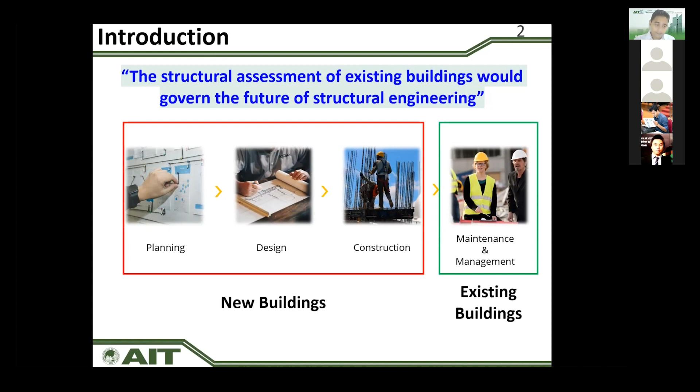Let us begin the parallel session of this AIT Tech Talk. I would like to start by stating that the structural assessment of existing buildings would govern the future of structural engineering. This is because while the construction of new space is just approximately 2% annually in countries like the USA, it is deemed to further reduce over the next few years and decades in most countries, mainly due to construction surge saturation and the construction of all the buildings happening right now. The domain of existing buildings would be more prominent, and these buildings need to be maintained and managed for the reduction of their capacity due to various reasons, and increase in demand due to natural or man-made hazards.

Today, I, Chaitanya Krishna, a faculty of Asian Institute of Technology in Structural Engineering, specialized in seismic assessment of reinforced concrete buildings, would be introducing the concepts of structural assessment of existing buildings, the challenges, opportunities, and our experience in conducting academic research and real projects, along with Dr. Prameen and Ziauddin.

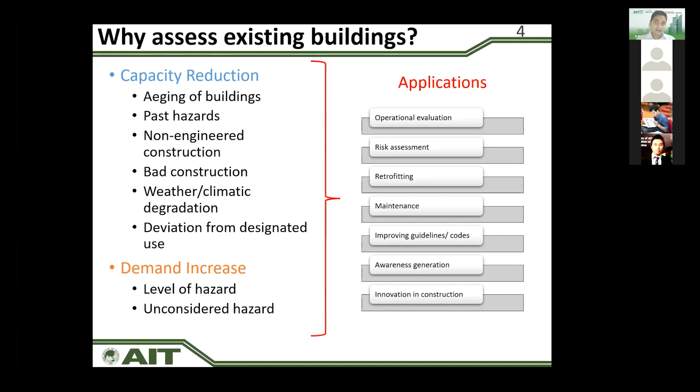This includes post-earthquake or post-disaster investigation to know the occupancy level of the building, or risk assessment by governments for creating disaster management plans, retrofitting or maintenance and related studies, or improvement of existing guidelines or codal provisions for future buildings, or creating awareness among communities, or using this as an outcome for innovation in the construction industry or retrofitting industry.

So where do we stand? We stand in between the real world and the analysis world, where the real world is full of unpredictable threats, large building stocks, unacceptable construction practices, and huge scatter in material uniformity, creating a huge amount of uncertainties.

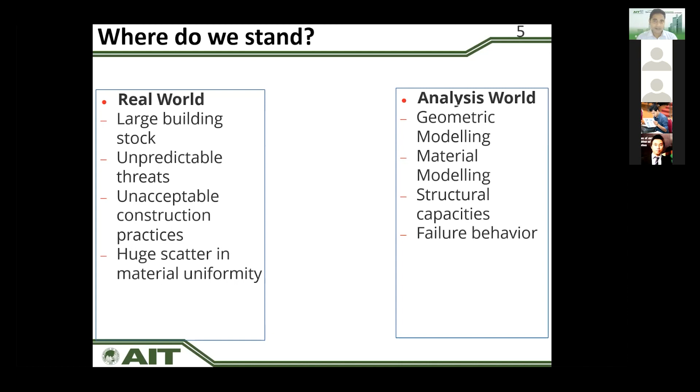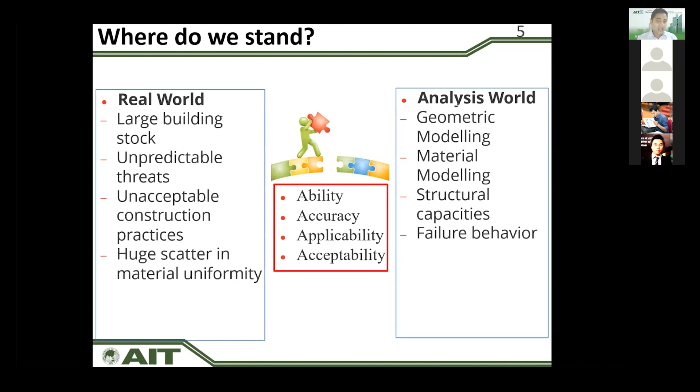Whereas the analysis world is mostly comprised of mathematical components such as geometric material modeling, or the structural capacities, or considering failure behavior. So we structural engineers try to bridge the gap between the real world and the analysis world with the principles of the 4 A's: ability, accuracy, applicability, and acceptability.

The engineering categorization of these analysis methods could range from the late 1800s, where expert opinion based approaches were used in the beginning to conduct the analysis of existing structures, when computers were yet to arrive and all the methods were yet to be in place where they are today. As mentioned by previous speakers in the morning sessions, it is very important to know that structural engineering is 80% common sense.

As the age progressed, we went for rapid visual screening or post-disaster assessments through questionnaires, or through visual inspections, or by using some basic measurement equipment to understand the behavior of buildings after a disaster, and using that as a knowledge base for future constructions, etc.

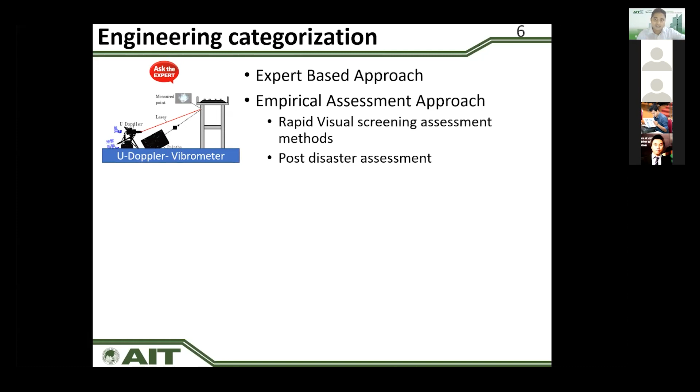The analytical assessment approach is mostly the numerical work that we do on software, on the nonlinear analysis software that we as structural engineers have been using.

A more recent and popular approach in recent times includes the use of non-destructive testing and structural health monitoring. So broadly, these are different approaches, and a combination of two or more approaches is the most desirable one. The analytical and experimental approaches are the hot topics that we are currently trying to develop, with a lot more projects and research in this particular domain.

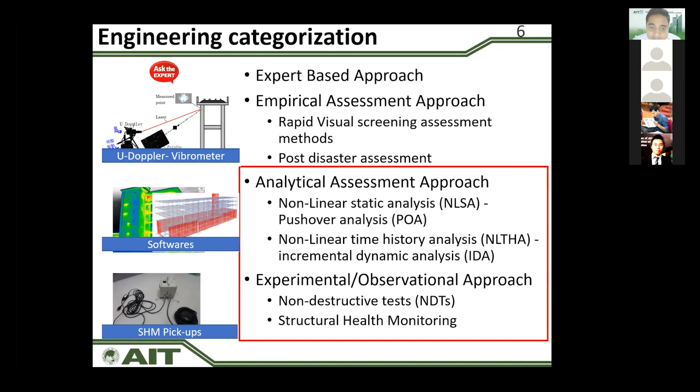Coming to some of the recent methods that we are interested in: structural health monitoring, where experimentation and system identification had started a few decades back.

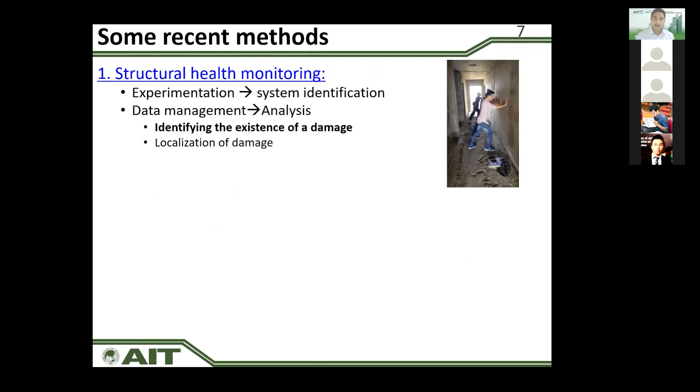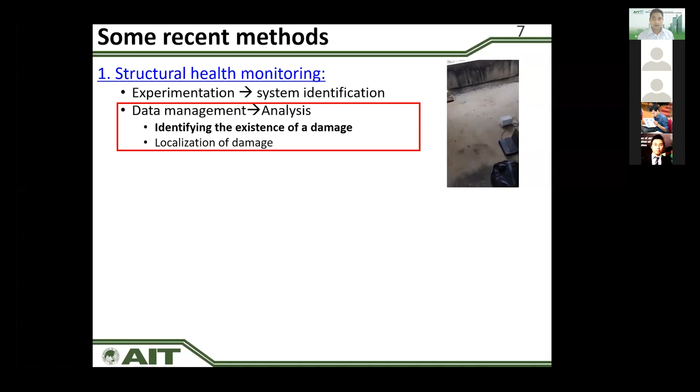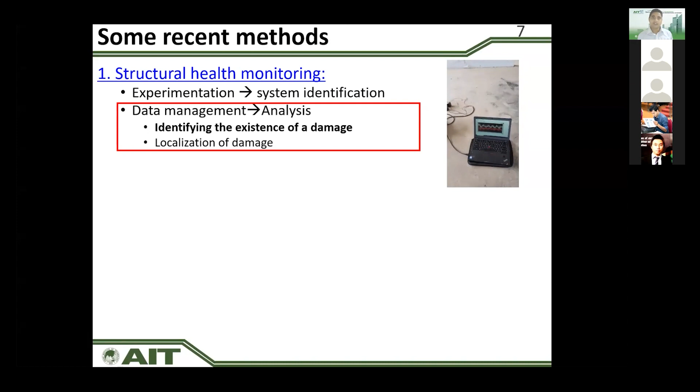And now it is coming into practice in terms of analysis, so that level 1 and level 2, identifying the existence of damage and quantifying the severity and location of the damage, has become a fast-moving research area in structural health monitoring, with the increase in availability of different testing methodologies. One more area gaining attention, and one we are interested in working with, is machine learning, which is more meticulous and superior, especially when the data set is fuzzy, vague, or noise-contaminated.

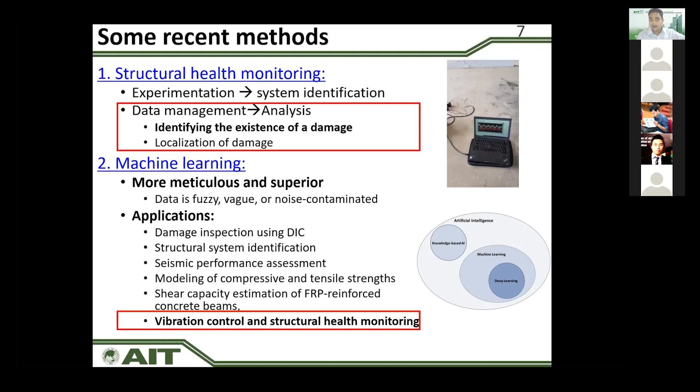The application of artificial intelligence is in various areas, such as damage inspection using digital image correlation, structural system identification, seismic performance assessment, material modeling, or estimation of capacity of the structure. What we are more interested in is using machine learning for vibration control and structural health monitoring in future, so that material property identification becomes a lot more data centric and reliable, so that whatever values you put in your numerical tools have higher meaning with respect to the available data collected in the last few decades.

Some of the academic research topics we have been working on will be shown here. One topic is where we try to merge a forced vibration test, called experimental modal analysis, and an ambient vibration test, which is operational modal analysis. We combine them with the help of numerical techniques, so that we could get modal parameters, and those modal parameters can be transformed into physical parameters to be used in numerical modeling, such as finite element methods, etc.

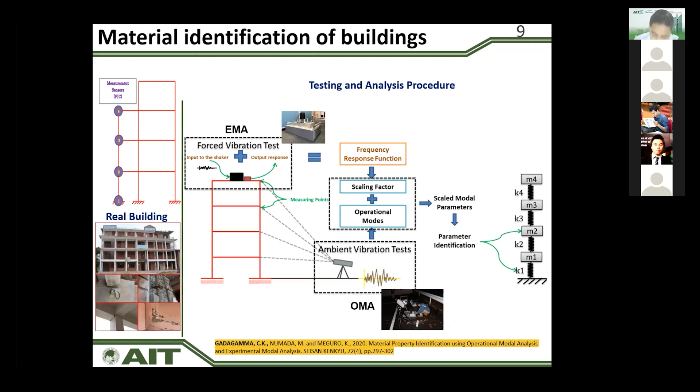Another research topic is a problem-based topic where buildings in Nepal particularly have businesses on their first floor, and because of these businesses, the buildings have the problem of soft story in the aftermath of an earthquake. But merely asking people to close their business by using a retrofit cannot be a direct solution. There are two major problems: one is the economic affordability of people living in these houses, and the second is asking these people to close their livelihood, which comes from businesses or parking lots, etc.

Academically, what we tried to do is use mathematical concepts, or the concept of numerical optimization, to optimize between the strength or safety required, and making sure there is enough or adequate space for the landlord to run a business inside. At the same time, not using steel or BRB braces is another way of reducing the cost involved in this particular retrofit.

So as an academic approach, using a technique called sequential quadratic program, we could optimize the usable space with respect to the strength, and found that the strength of these buildings was increased by allowing some amount of business space for these people, and by making use of concrete as a retrofitting material, the cost or locally available retrofitting material was achieved in this research.

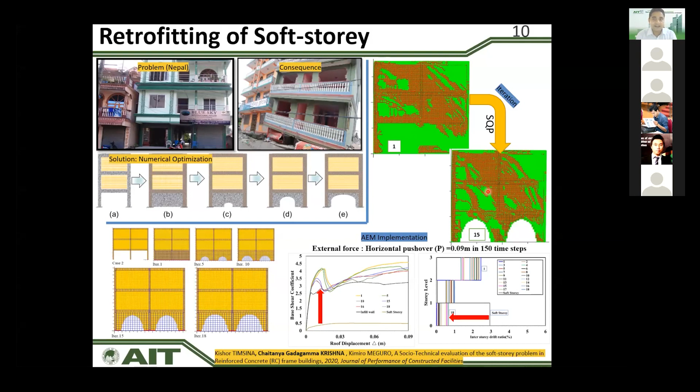In another research, we were trying to find the problem of non-engineered construction in countries like India, Nepal, Pakistan, Bangladesh, or many other Southeast Asian countries, where there are plenty of problems. One of the problems we identified was improper rebar splicing. But this is not just one problem; there are plenty of other problems with respect to the construction industry, which is highly localized by inexperienced and non-technical masons.

Studying this experimentally would take ages to cover all the problems we have on our sites. So a low-cost experimentation using microconcrete, combined with numerical modeling, was used in this approach, so that the cost of experimentation is lower, and alternative arrangements or possibilities could be evaluated numerically by validating the experimental model, allowing a large number of case studies to be done through this academic research.

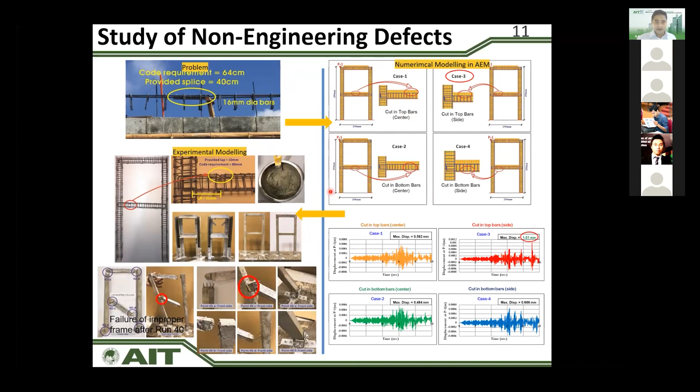This is another research in which blast analysis was summarized. Here we have highly nonlinear modeling software in practice. One such software is called Extreme Loading for Structures, which follows the applied element method technology to model blast loads. However, unlike wind loads or earthquake loads, blast loads do not have comprehensive assessment procedures.

For example, questions like how to compare different blast loads on a building, what is the capacity of a frame subjected to blast load, how to strengthen the building to withstand blast loads, what is the effect of debris fall, or is the debris lethal, etc., are questions that cannot be answered from numerical modeling alone. So what is needed is a comprehensive blast response analysis.

So in this research, what we do is, from the highly nonlinear modeling that we get, the results are summarized into structural blast, debris analysis, and residual capacity of the frame.

With this, you can summarize blast effects for different kinds of buildings, different kinds of claddings, or maybe you can strengthen the building and then apply blast. Different cases can be compared, like in the case of earthquake or wind loads on structures.

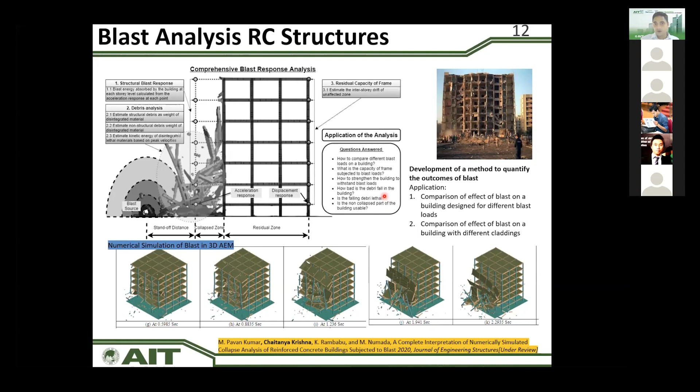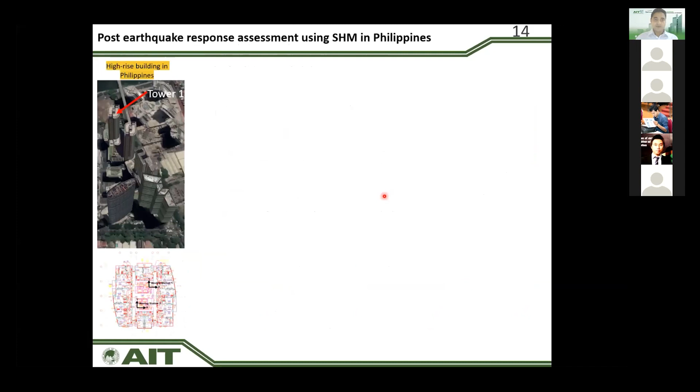Coming to real projects executed in AIT, I would like to show you a project in the Philippines, for which the methodology was to measure the dynamic characteristics of a building before and after an earthquake. Modal identification was done for both cases, and a preliminary evaluation was done to proceed to a detailed investigation.

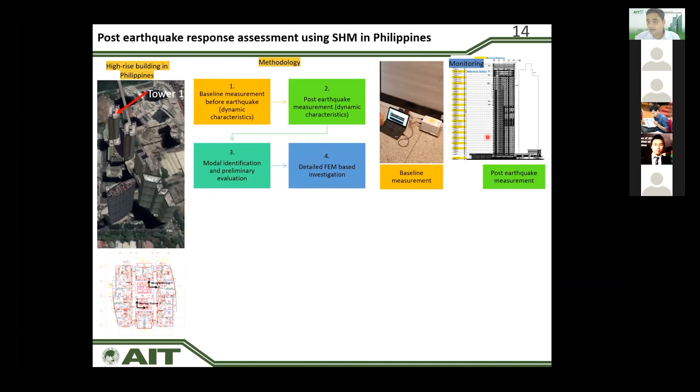For this purpose, a baseline measurement and post-earthquake measurement was done. After analyzing the modal properties, we could see from the preliminary evaluation that the change of natural period had shown some damage, and therefore it was recommended to proceed to a detailed investigation in this project.

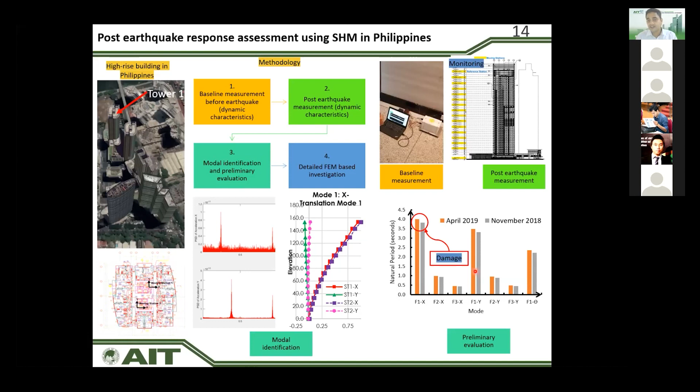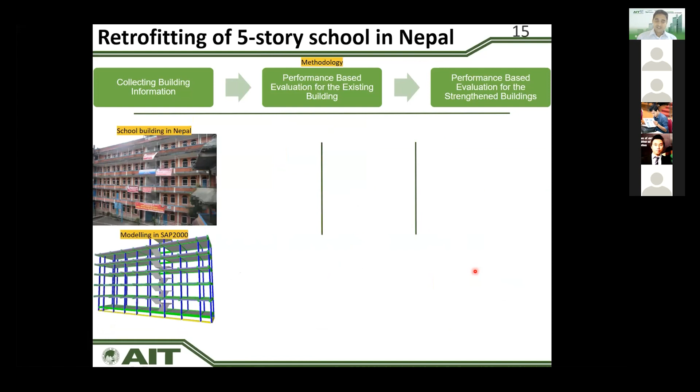A school building was considered which suffered damage in the Gorkha earthquake, and was modeled in SAP. Three different retrofitting methods - column jacketing, shear wall, and buckling restraint braces - were recommended and modeled in SAP to evaluate this.

Nonlinear static pushover analysis was conducted to find that shear walls were more effective, and column jacketing was highly ductile at the global level, but further member level investigation was needed according to this project's conclusion.

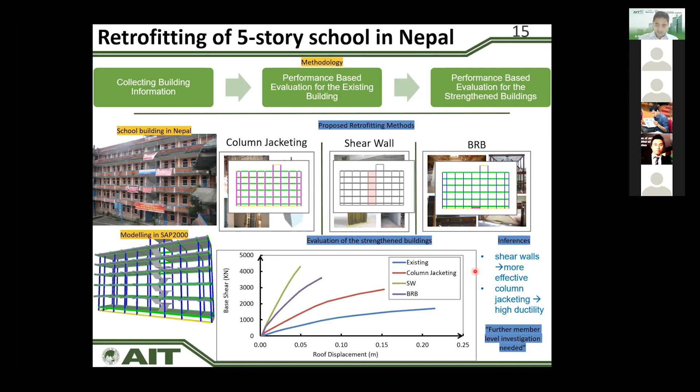Some more similar projects executed in AIT include a 4-story hotel building in Nepal, for which shear walls were proposed based on performance assessment.

A retrofitting or re-strengthening strategy was investigated for a reinforced concrete building in Bangkok with the same methods: column jacketing, shear walls, and steel bracings.

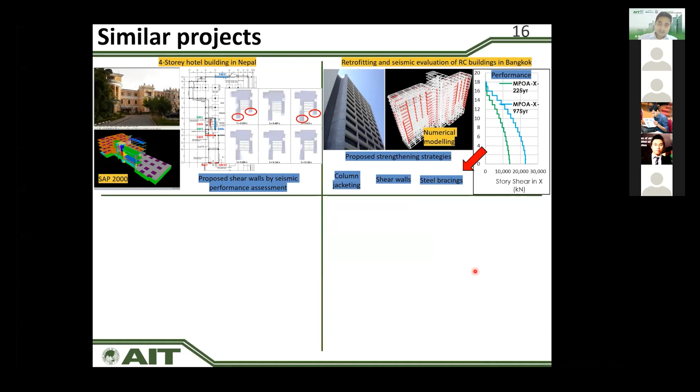A similar reinforced concrete frame building in Nepal, after the Gorkha earthquake, was evaluated for a proposal of shear walls in the building using ETABS and Perform 3D.

A similar investigation in Bhutan to verify the adequate demand capacity ratio, to see whether the building was safe or not, was executed.

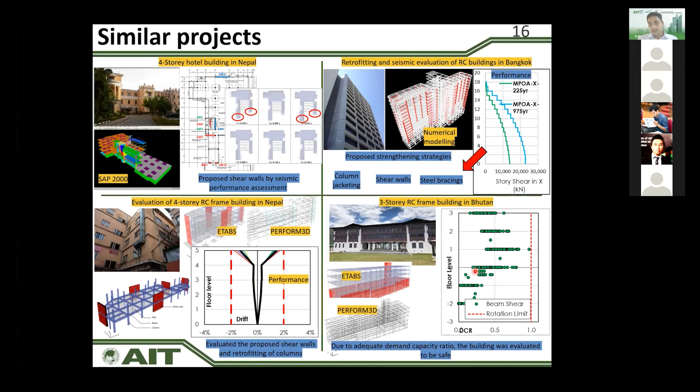To summarize, while we have buildings getting damaged due to catastrophic earthquakes, we also have buildings like shown in this figure, where the building had collapsed without an earthquake, without a wind load - just due to over usage, poor construction practice, and inappropriate use of the building, deviating from its designated use, which caused such damage.

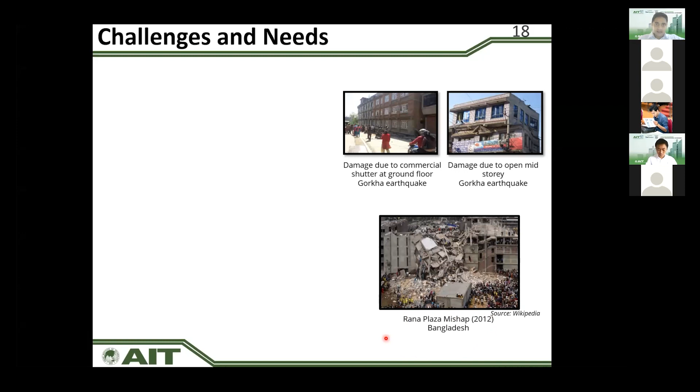These kinds of situations put us in various kinds of challenges and needs. The challenges include the large building stock and growing constructions with non-uniform material properties, not knowing the reliability of non-destructive testing, and the incapability of modeling highly nonlinear behavior.

Some of the major needs include the need for convenient and reliable testing. Improvement of codal provisions and guidelines is an important need. We also need a lot of cost-effective experiments, because a large number of experimental knowledge is needed to overcome the problems we have in structural engineering.

We also need reliable modeling tools and reliable modelers, like what was mentioned in the morning session, that many structural engineers should choose to become programmers to develop their own software. And we also need modern tools and techniques, including software as well as hardware.

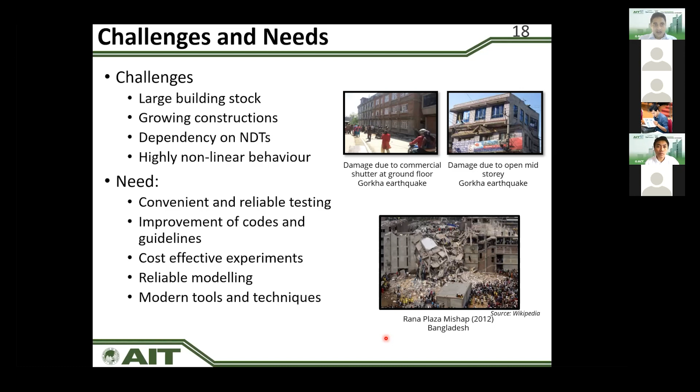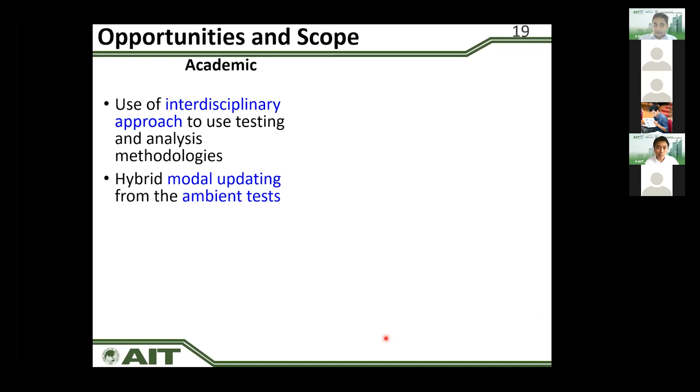This turns into various kinds of opportunities. In academia, we need to use interdisciplinary approaches for testing and analysis methodologies, and we need hybrid modal updating to identify material properties from the ambient tests.

We need to use cutting edge machine learning, supervised or unsupervised, to estimate material properties and reduce the human effort involved in assessment of existing buildings.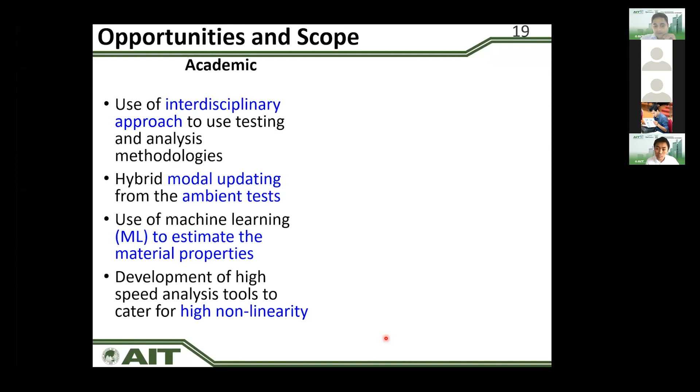We also have to develop high-speed analysis tools to cater for the need of highly nonlinear behavior, as shown earlier. Some real project opportunities include retrofitting methods, development of maintenance guidelines and procedures, operational evaluation of buildings in the aftermath of an earthquake, development of risk and vulnerability maps of societies, and development of disaster management plans.

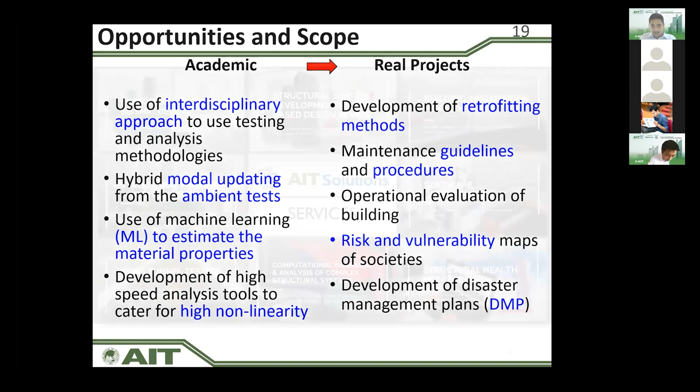If you are interested in collaborating with us in some of these analyses of existing methods, this would be the contact information for you to do so.

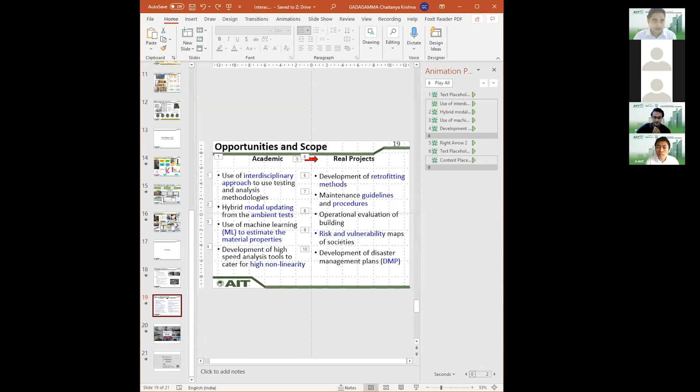The first question that I received is from Ayman. His question is, what is the software used for blast loading numerical simulation? Okay, just a minute. Let me go to the slide.

The software used for blast loading simulation is called ELS, Extreme Loading for Structures.

Is Ayman there? Hi, Ayman. So, hello, Ayman.

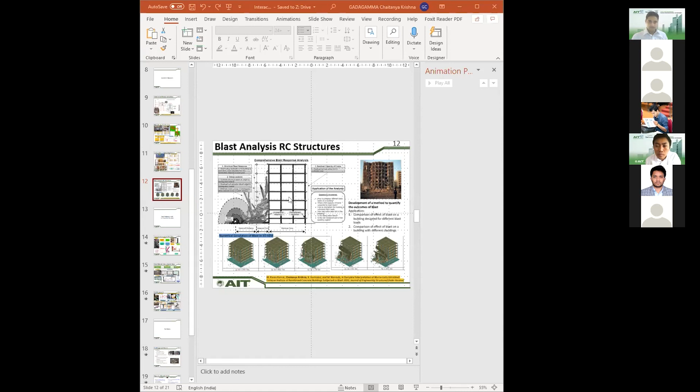Yes, next question. There are a bunch of questions, I think all for Dr. Pramin. Two of them coming from Niharika. One is, she referred to slide number 16 — could you move to slide 16 also? Her question is, what was the difference in analysis found with two different software, Perform 3D and ETABS, used for evaluation of four storied RC buildings? Is one better and the other unacceptable? Another is, how are you modeling the hinge behavior for the retrofit sections? A similar question came from Dave Ramos as well.

Two questions from them. Another question is from Matt: how do you model the column jacket or retrofit method in your analytical model? So three questions regarding the software applications. Okay, you can repeat the question again. Anyway, I will start with the first one.

First one, regarding slide 16, how can we select the different software between Perform and ETABS based on this slide? As you see, they have some background story when we use the tool to analyze the work, because all projects have time limitations. Actually, we will go with whatever software we are most familiar with.

Because seismic evaluation based on ASCE 41 requires us to evaluate the existing structure based on two levels of earthquake: small and large. For the small earthquake, the response tends to be linear only because it's a frequent, small earthquake. For the large earthquake, like up to 2,500-year MCE level, it will go nonlinear because it's a large earthquake. We will never design a building to receive that kind of force in terms of strength.

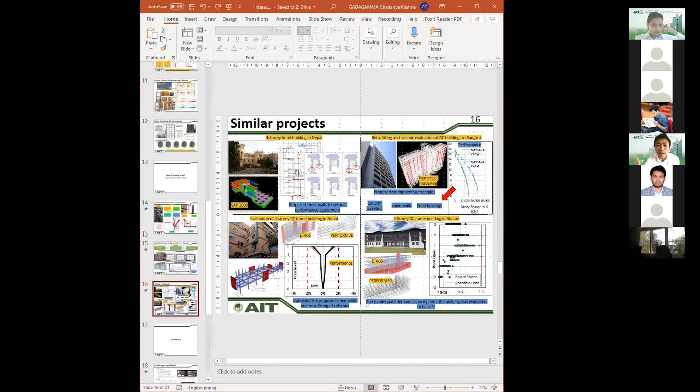ASCE 41: if you have experimental results, you can directly apply that as well, the guidelines allow you to do that. That is the reference. You can also go back and see other guidelines like FEMA. They have many kinds, but it depends which guideline you choose for your project. For me, I just go with ASCE 41 first; you can follow that one.